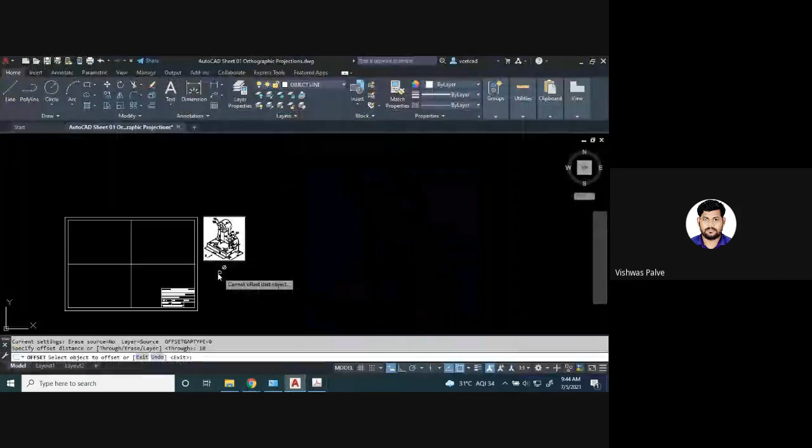Okay, so when we are starting with this orthographic projection, we have to draw the front view from direction X, top view, and right hand side view, which will be drawn on the left hand side. So the first thing we have to record is how much is the maximum length, maximum height, and maximum width of the problem.

As maximum length is 140 millimeter, you can see this is the maximum length of the problem. Can anyone tell me how much is the maximum height? 150. So how you have calculated that? For calculating that, it will be 30, 60 means 30 plus 100, 130 plus 20, 150, and maximum width is 90.

Okay, so when we start with the orthographic projection, first we draw reference lines. After drawing reference lines, we'll take 10 millimeter, or on the paper you have to draw parallel lines at a distance of 10 millimeter, 10 millimeter.

Now when we are going to draw this, we have to draw the right hand side view. Right hand side view will be drawn on the left hand side. So we have to take care that we leave enough space so that we will be able to complete the side view. Okay, that we have to do.

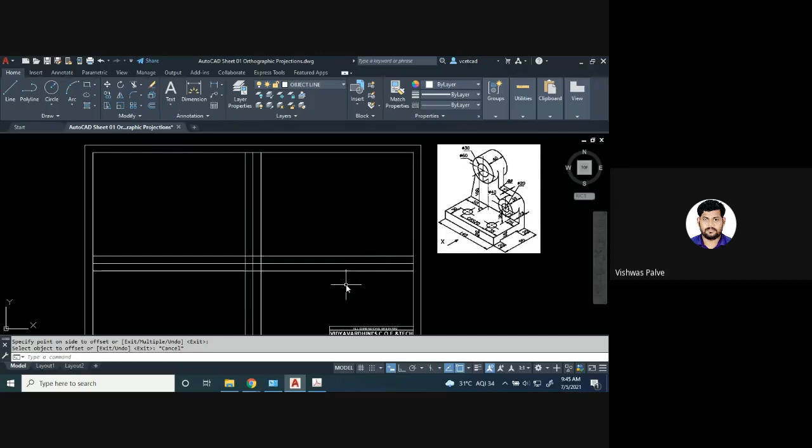Then we'll draw the front view first. In front view, the horizontal line of, we'll convert this as a projection line.

So for the object line, I will start with the base having a height of 20 millimeter and length of 140 millimeter. So I will draw a horizontal line of 140 millimeter, then a vertical line of 20 millimeter, then again horizontal 140, and close it with 20.

So this portion, when we observe it from the front, you will get this rectangle 140 by 20. And in that there are two holes. So those holes and the internal features I will draw later on. Let us first complete the outline.

After doing that, we have to draw a 50 millimeter vertical axis parallel to this 20, at a distance of 50 millimeter from this edge. So I will select this line, offset by 50 millimeter, and take a reference. Now this line I can convert into a center line, and I can change the scale of that line so that it will be visible properly.

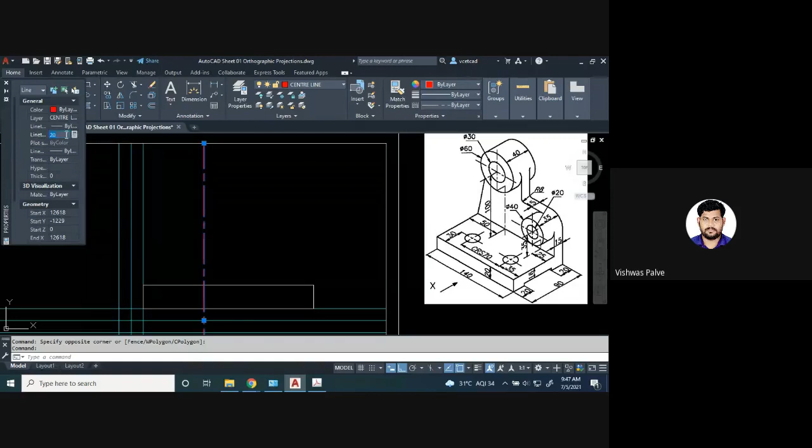Okay, so the height is 100 millimeters. So at a distance of 100 millimeters I can take an offset, drawing a parallel line at a distance of 100 millimeter on this side. So you can see that the problem is not going to fit on the paper. Now here I can directly move it, but on paper you have to calculate how much is the maximum length required, maximum height, and maximum width required, so that you can complete it properly.

So I will delete this for now, and I'll delete this block also, so it will not interrupt my question. Then I'll take this center line and match the property.

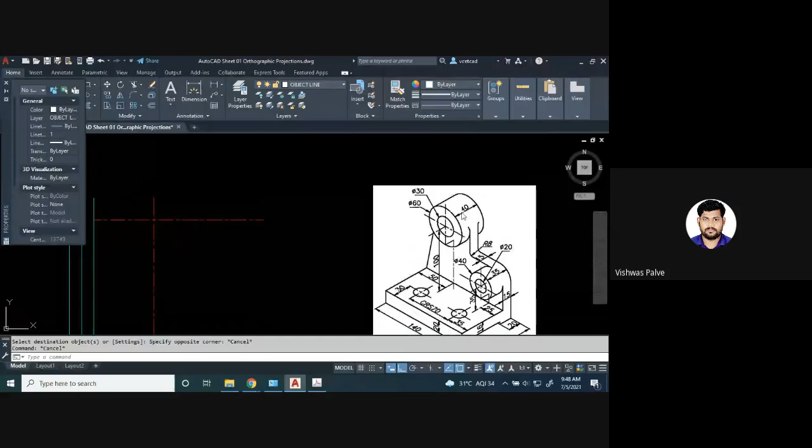This is the intersection point where we have to draw these two circles, one of diameter 60, another of diameter 30. So from this intersection point, we'll draw a 30 millimeter radius, meaning 60 diameter, and a second 15 millimeter radius, meaning 30 diameter. So these two circles I have drawn.

Then next, you have to draw these two circles, which are at a distance of 25 millimeter from the other edge, and height is 35 millimeter. So I can directly take an offset of 25 millimeter. Here is that, and I can extend it slightly, then convert this into a center line.

And vertical distance of 35, so I will draw another horizontal line at a distance of 35 millimeters, so I can locate the center. I'll convert this also into a center line.

After this, we have to draw two circles, one of diameter 20, another of diameter 40.

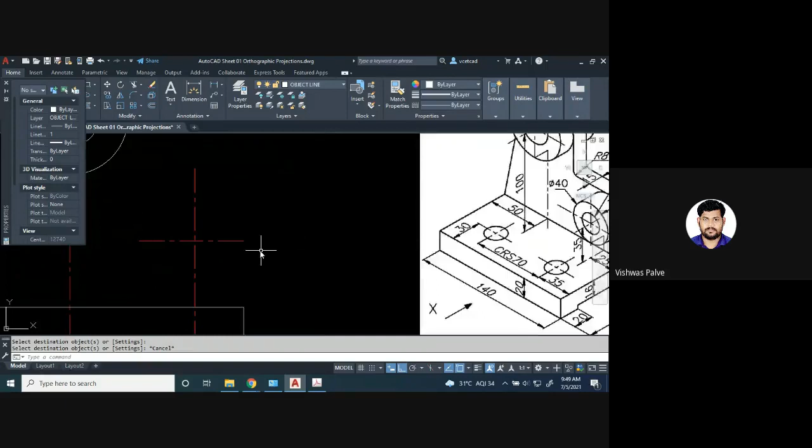Whenever we are drawing an orthographic projection, whichever part is easy, we can draw that first - you have to concentrate on that. So I have drawn these two circles so that a major part will get covered. I located the centers first and then connected them.

After doing so, from here you have to draw a vertical line and then horizontal, connected with an inclined line tangential to that circle. Then similarly, from this point, you have to draw vertical and then horizontal from here.

Wherever those two lines intersect, that will be the point. Then from this point, it will be drawn as a tangent. Okay, the tangent symbol is already being seen, so here we have completed.

Now we can see that a radius of 8 millimeter is given. So how are we going to draw this? On paper, what do we have to do? Suppose you want to draw it on paper with a radius of 8 millimeter.

So what I will do is take a reference of 8 millimeter, and from there draw an 8 millimeter line. Similarly, from this side, I'll take 8 millimeter and draw vertical. So I will locate the center, 8 millimeter from both edges, and from that point I'll draw a circle of 8 millimeter radius.

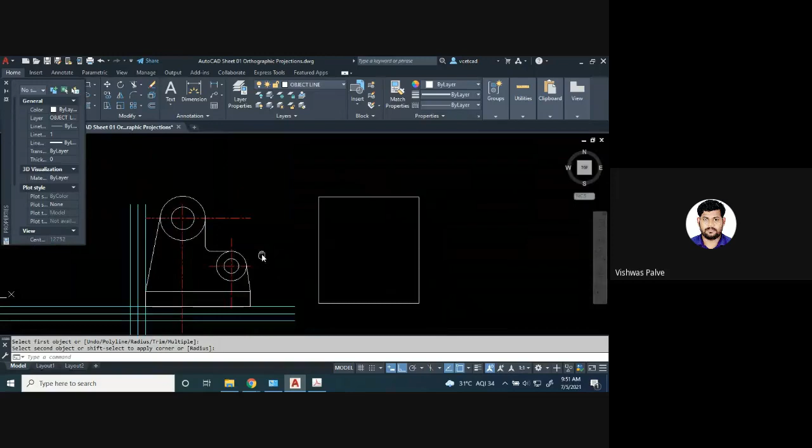Now suppose if I want to draw it on AutoCAD, no need to do all these things. There is a command called fillet. In that, fillet, radius R, enter, radius of 8 millimeter - you have to specify the radius 8 millimeter. Select the first edge, select the second edge, and automatically that edge will get trimmed. So I've given the hint for both ways - you can draw it conventionally as well as on AutoCAD.

Now, after completing this, in front view, what details will be visible? The circular part is done - the bigger circles and smaller circles have been drawn. Only the hidden lines remain, right?

Now there are two circles, and they are marked as CRS 70, meaning the distance between them is 70 millimeter. So first, at a distance of 35 millimeter, I will draw this hidden line. I can take the offset of 35 millimeter. Yes, here there is a center - I can convert this into a center line.

I'll say match property, I'll convert this into a center line. So I have located the center. Now how much is the diameter of the circle? You can see that the diameter of that circle is not mentioned.

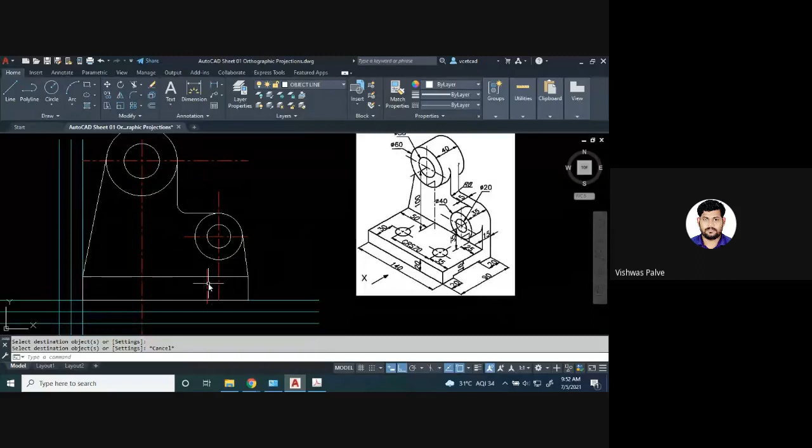Everyone please note down the correction here - the diameter for this circle is 20 millimeter, so 10 millimeter radius. Then I will take a hidden line, L, enter - first I'll draw the center line.

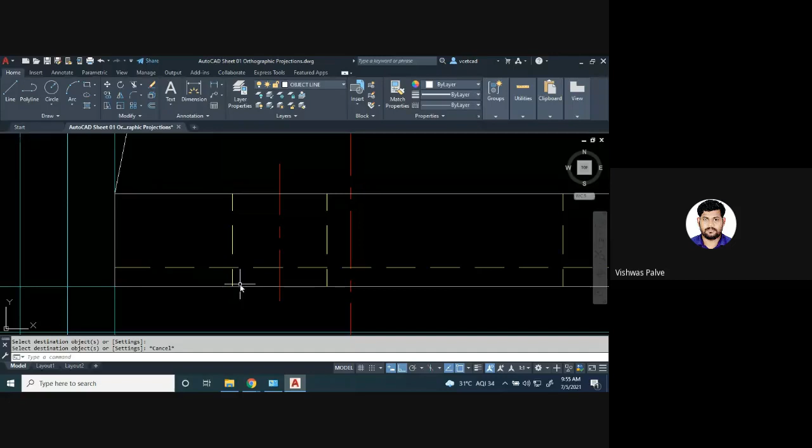Offset at a distance of 4 millimeter from the bottom, and then convert this into hidden. I'll select this line, say match property, and convert this into hidden. Now one more thing - you can see that this slot cannot be beyond the material. Here, let me see, yes, this portion is falling, right?

The material is not there, so I will use TR, double enter, and remove this portion. Because if there is no material then there won't be a hidden line, so this slot will be up to this hidden line - beyond that there won't be this slot. So here we have completed our front view.

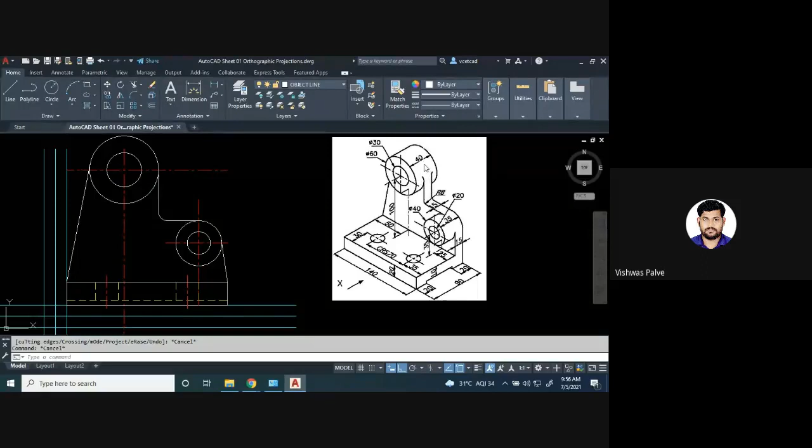So in that, you consider the front portion as 20 millimeter and the rear portion as 15 millimeter. So 15 plus, sorry, one second, 15 plus 50, yeah that is 15 millimeter. This dimension is 15 millimeter.

So 40 minus 15 is the remaining distance, that is 25 millimeter. From that 25 millimeter, you leave 15 millimeter at the front side and 10 millimeter at the rear side. So 10, 15, 15 - this will be the total distribution. Please note down, is that clear?

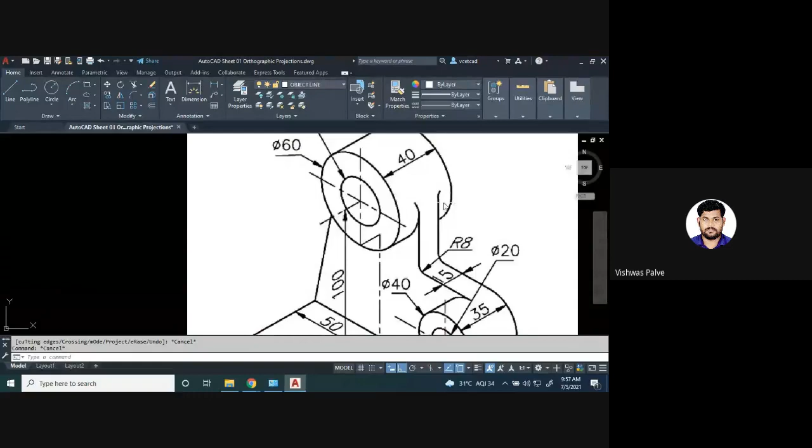So the center portion is 15, the front portion is 15, and the rear portion is 10 millimeters. So 10 plus 15 plus 15, that is the total distance of 40 millimeter. So the total width will be how much? 100 millimeter. It is not 90 because 90 millimeter is up to this extent. So beyond that, the cylinder has been extended.

So that portion also we have to draw. Our first task will be, when we observe it from top, we'll draw this cylinder because this will be completely visible. So that portion I will draw first. I want to draw this cylinder. So how much is the dimension? Let us check, from projection itself I can take the projections. From here I'll directly take projections. Similarly, from the other side.

I'll select the object line now. And the total distance is how much? 40 millimeter. Horizontal distance 60 millimeter, again vertical distance of 40. And I'll close this. Okay, so I have drawn this outer edge.

Now if I don't want the projection line, I can hide it off. If you don't want to view the projection line, I can hide it off, or if I want to see again, I can just switch it on. After that, I will take a reference of this and I will draw.

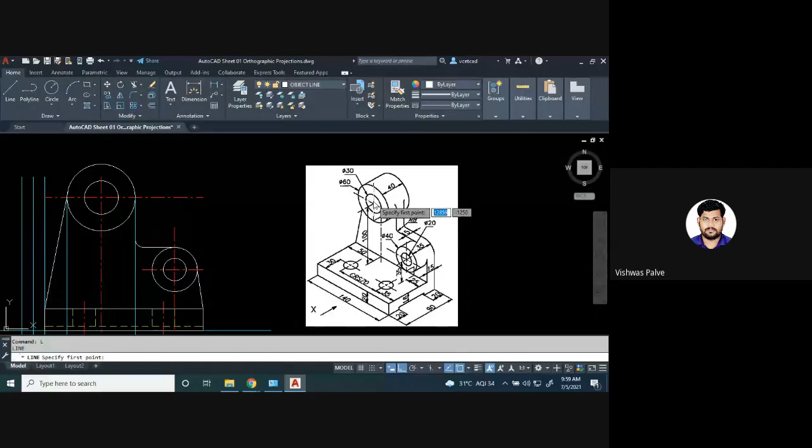I will draw the hidden line. When we observe it from top, there is a hidden line which will be seen. There is an internal slot which will be seen from the top. So we have to show the internal feature of this cylinder, and for showing the internal feature, we will be showing it with the hidden lines.

So for that, I'll take a projection lines, I'll select the projection lines, and draw a reference. Then I can select the hidden lines, L enter. From these 2 points, I will connect it. Then I can change the property of the line so it will be visible, and if not required, you can remove this.

Hello, am I audible now? Yes, sir.

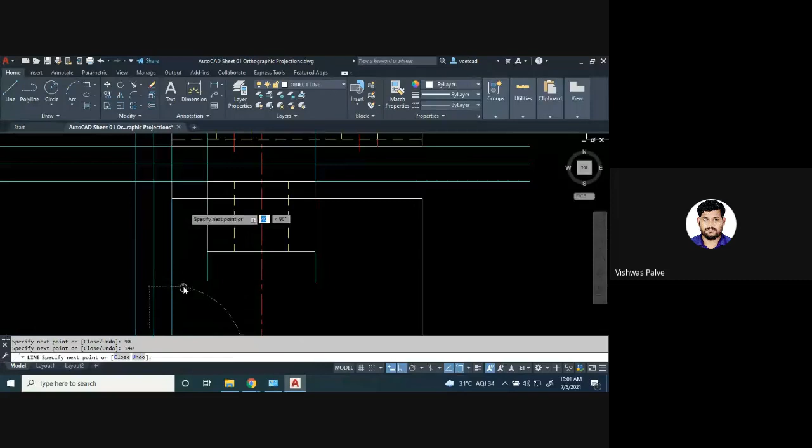And this will be of 90 millimeter. Horizontal distance again 140, and you can connect it with this. So I have drawn this base.

So when we are showing the base, what will be happening? The hidden line, here we have to show the hidden line because it will be visible. So for that, I'll delete this portion. I will draw another line and convert that into hidden, using match property, and convert it into hidden.

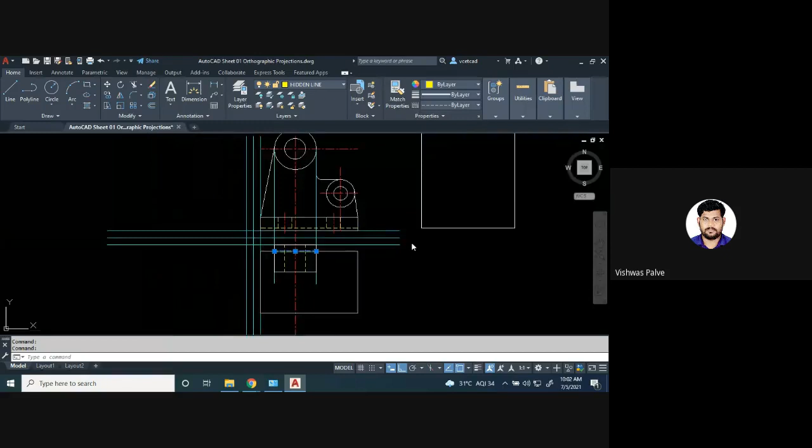Because that slot, that cylindrical portion is hiding the edge, we have to show that edge, and we cannot show it as a dark line because it is not visible from the top, as it is underneath that cylinder. So that's why we are showing this hidden line. Is it clear? Any difficulty till now? No, sir.

Okay, so after drawing the cylindrical portion, now let us move to this another smaller cylinder, which is having a width of 35 millimeter and diameter of 40 and 20. So these are the two circles. Again I will take a reference of projection.

Here 35 millimeter. Horizontal distance 40 millimeter, again I'll connect it with this. So the cylindrical portion I have drawn. The minute details we have to trim off, that we'll see later on.

So let us draw the internal feature, that is hidden line, which is having a distance of 20 millimeter. So if I extend the center line from center line 10 millimeter on both sides, so offset distance, the distance of 10 millimeter. So the internal diameter will be of 20 millimeter.

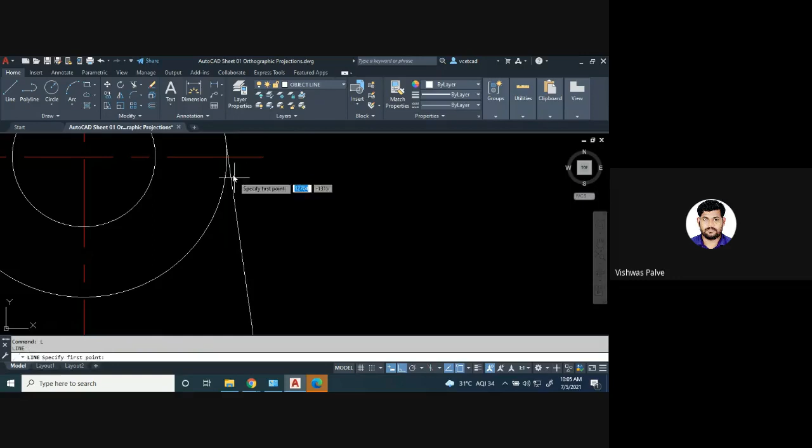Wherever that tangent intersects, that is the point. If you see, it is a very small distance. So I'll draw that distance, 15 millimeter, and connect this rib up to that tangential point, and I'll delete this line.

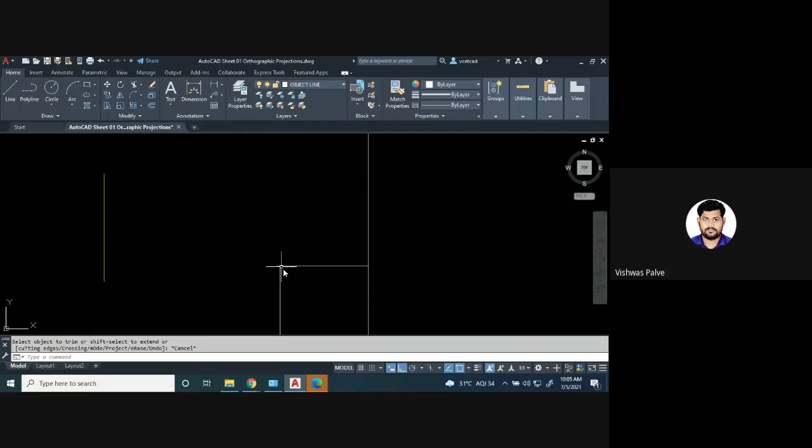So here we are showing the rib. Whenever there is a rib, that portion we won't show this line. You will see only 1 millimeter or 2 millimeter it has been extended, so at that point you have to show the curvature. So this rib portion of 15 millimeter we have shown.

Now let us show this 15 millimeter rib. Already a line has been connected, and then I have to draw this portion will be seen, and then it will be extended till the center line, and this portion won't be visible.

So this rib here is vertical, so it will be seen as a straight line, but the horizontal portion of that rib will be seen up to center, and the cylinder will be hiding below that. So that portion we are going to show it here.

Now this edge, you can see that this edge of that cylinder or the corner edge will be visible, that is at a distance of 15 millimeter. So we have to show that edge.

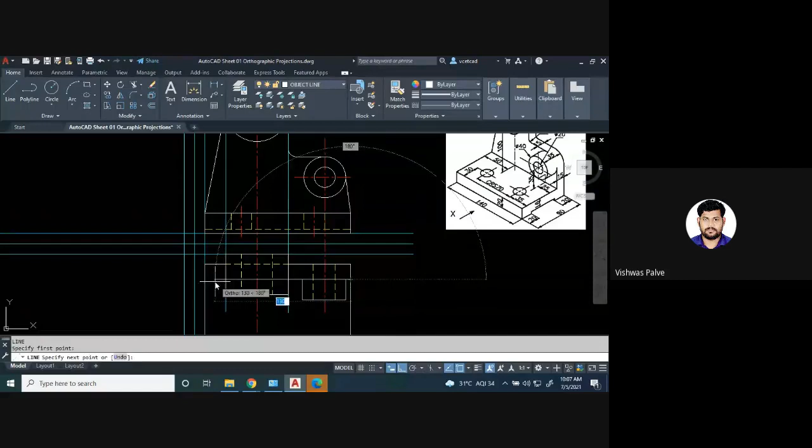So what I'll do, I'll draw a line from here up to this point, and I will trim the edges wherever it has overlapped. This portion I don't want. Similarly, wherever it is falling outside, this portion, this portion, this portion.

This rib, the corner point, wherever there is a change of the surface, that we have to show. So wherever that portion has been drawn, that part we have to show it as a hidden line. I will draw a hidden line here.

This hidden line will be visible. Then again, this hidden line will be visible. Then in the cylindrical portion, complete line will be there. So, match property.

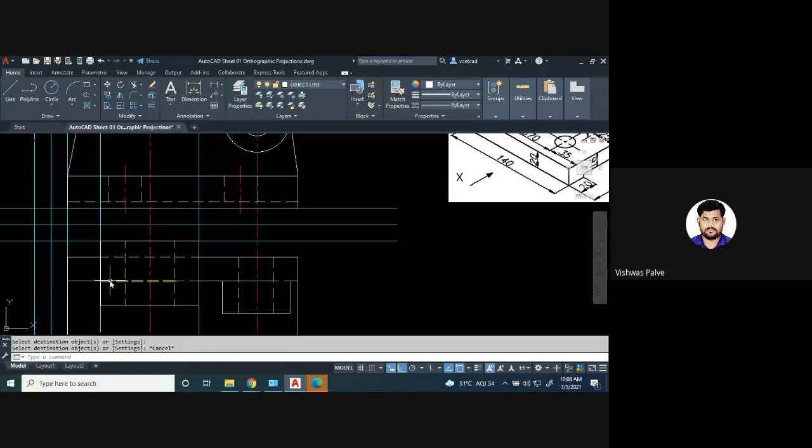Control Z. Okay, so this much portion won't be visible, so that we have to show it with a hidden line. Here what is happening, the top edge has been visible, so it is overlapping, the hidden line is overlapping with the object line. So whenever there is an overlap between the hidden line and object line, the preference will be given to the object line, so that this also will be hidden.

So we are going to extend this line up to there. Okay, so the hidden lines have been drawn.

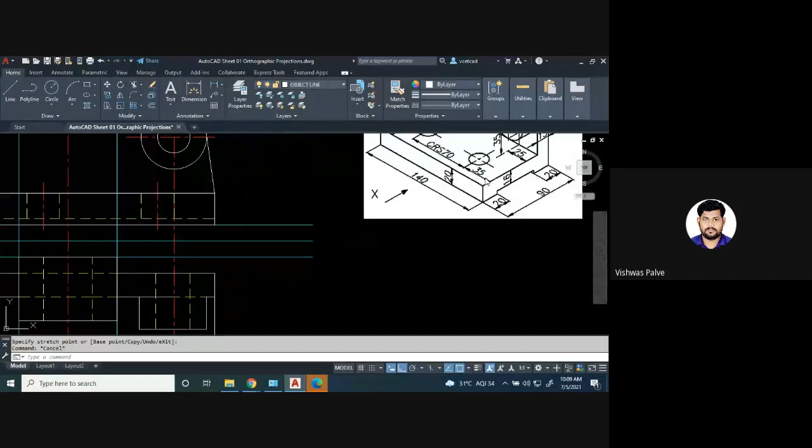Now let us draw the circle, 35 millimeter and 30 millimeter from the other side. So already the center lines are there, but still at a distance of 35 millimeter and 30 millimeter from here. So I have located the center at 35 millimeter and 30 millimeter. At that point, I have to draw a circle of 10 millimeter radius.

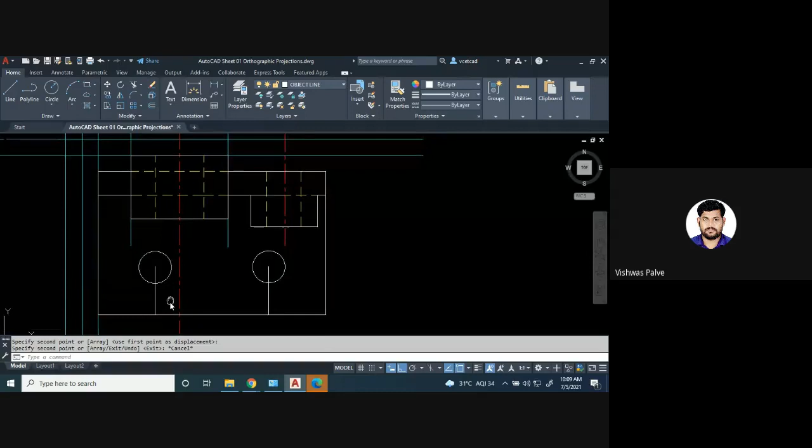Same distance, at a distance of 70 millimeter I will draw another circle of the same radius. Then I will convert these lines as a center line.

I used to draw this as a center line. Similarly, horizontal center line. Whenever there is a circle, you have to show the center lines. Okay, these two circles I have drawn.

Now below that there is a slot, and the width of that slot is 20 millimeter on the right side, 20 millimeter from the left side. From both sides it is 20 millimeter. So we have to show that slot.

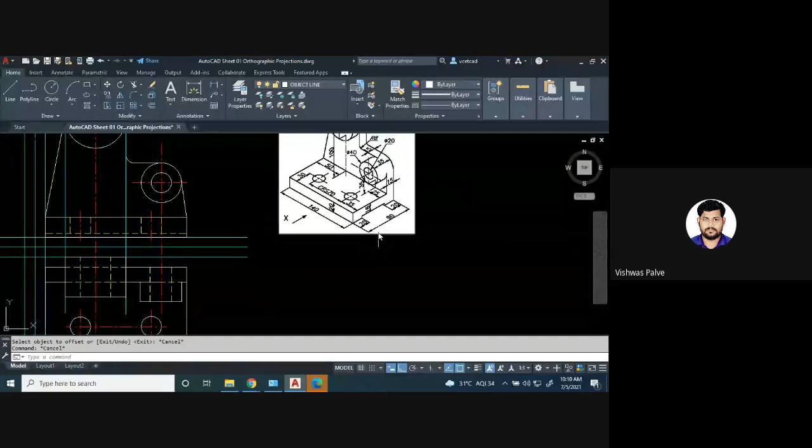So for that, I will take an offset distance of this 20 millimeter on this side. Similarly, total is 90, 90 minus 20 is 70 millimeters. So from this edge, it will again be at a distance of 70 millimeter. Offset at a distance of 70 millimeter from this edge.

Okay, these are the two lines. I'll convert that into a hidden line. When we observe, that slot should not be visible, so we cannot show it with an object line. For that, it has been shown with the hidden line. So here we have completed our top view.

If you want to see the minute details, I will switch off the projection lines. So to complete both the views, how much is the maximum dimension required?

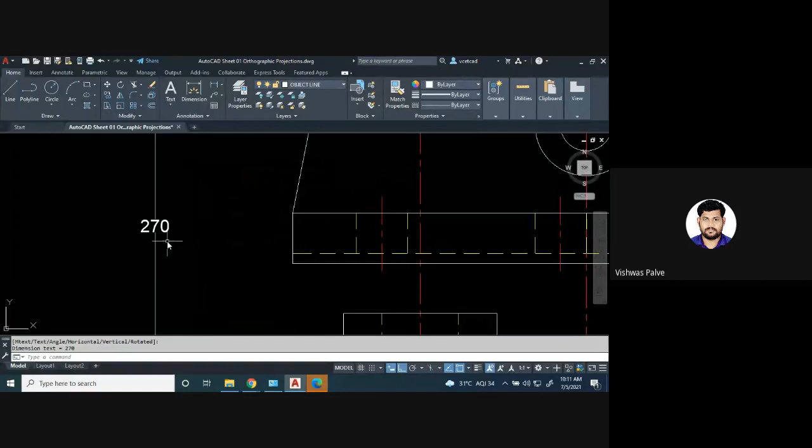270. How much is the size of the A4 size paper? Somebody has posted that it is not fitting on the assignment book.

Please everyone make this correction so that it will fit. Instead of 100, you take this as 60 millimeter.

Will it fit then? Hello, Rohit. Yes, sir. If you make this 70 and you make this 25 instead of this 35, how many of them have started drawing?

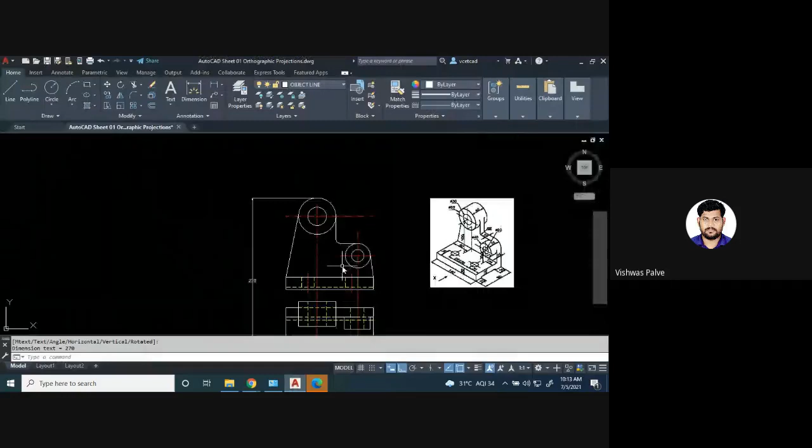Will it fit then? Rohit, please check. If you take this as 70 and this as 25, so do one thing, you take this as 60. Instead of 100 millimeter height, you take this as 60 millimeter and you take this as 25 millimeter. Then it will solve your problem.

And one more thing, if you want to save space, then instead of taking the offset distance of 10 millimeter, you take it as 5 millimeter from both sides, 5 millimeter from bottom, 5 millimeter from top. So here also you will get 10 millimeter.

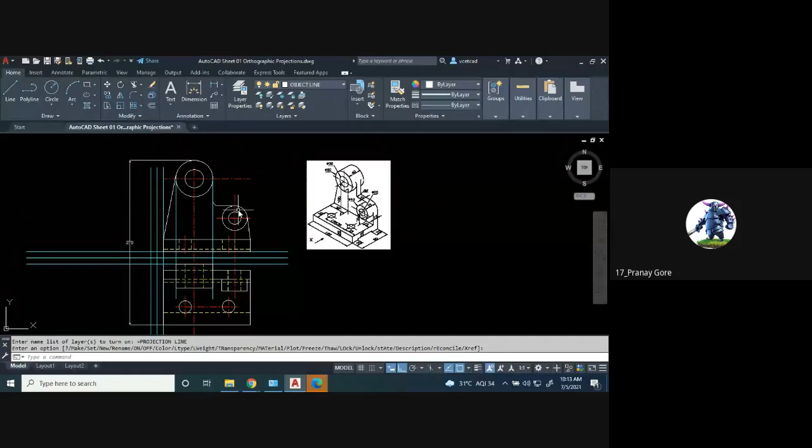Then you will... Can we try portrait mode? Portrait mode will not fix the side view. Please check whether side view is fitting or not.

Let me complete the side view and then you can decide whether you want to draw portrait or landscape. So if you want to fix it, I have given a solution.

You can reduce this dimension to 60 millimeter and this 35 you can make 25 millimeter. So the height of that problem will automatically get reduced. Let me reduce that. If I reduce, then what changes will we see?

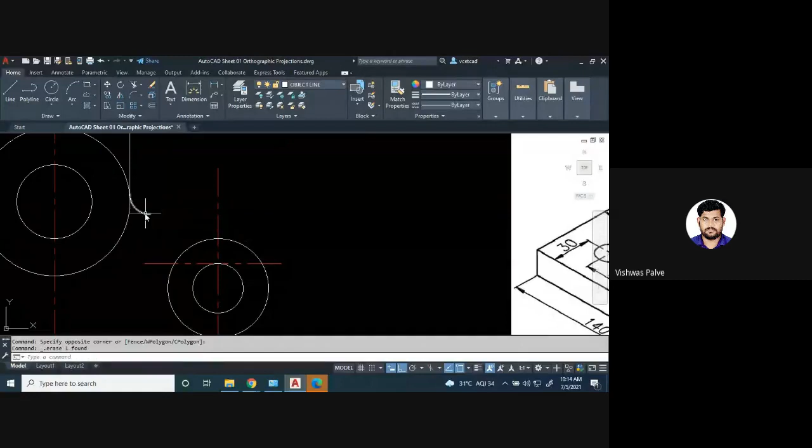This by 40 millimeter if I reduce, and this I want to reduce by 10 millimeter. So the changes will be these lines. I will redraw those lines.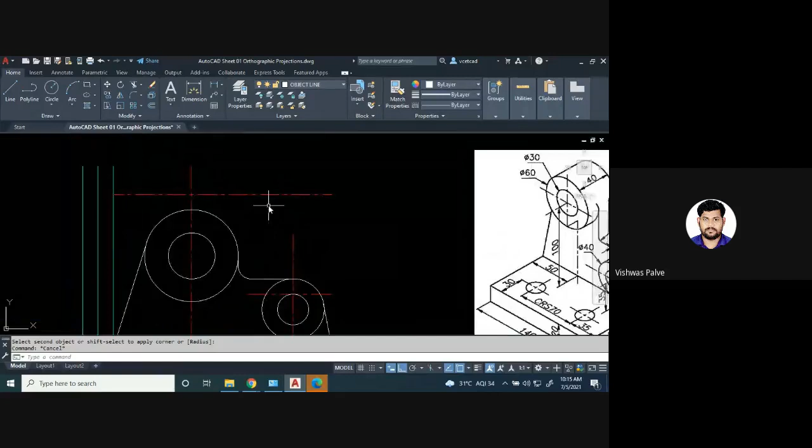This will be the changes. So now how much is the maximum height? I'll check and tell you. It is 230 now.

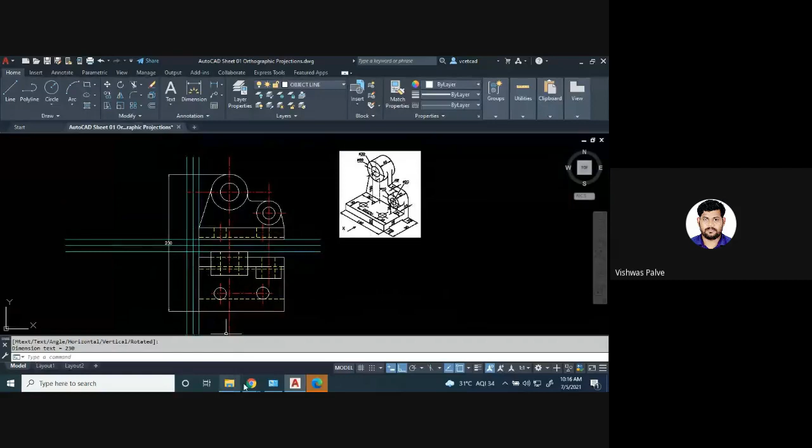Yes, Rohit. Yes, sir. Sir, in portrait it is fitting. Okay, in portrait, if it is fitting, then you can solve with the normal dimensions, no problem then. And those who have started with the landscape mode, you can make these small changes and solve this.

So should I continue with the side view? Yes, sir. Okay. Any difficulty till now in front view and top view? No, sir. Okay, fine.

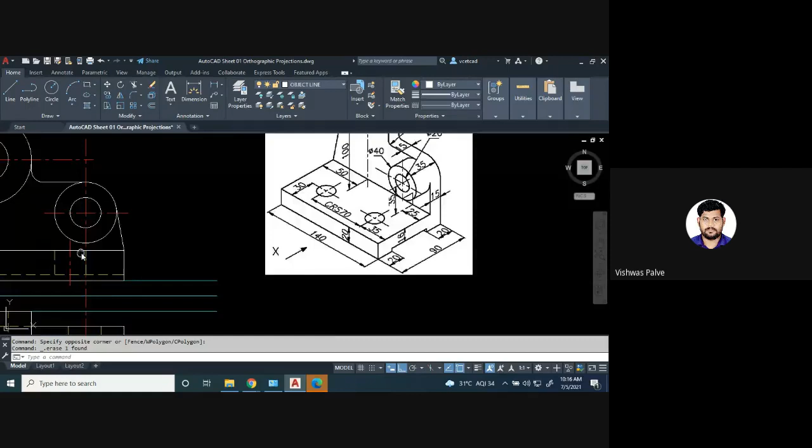So let us move to our side view. When we observe this object, the first thing which will be seen is this 20 millimeter and 90 millimeter is the total width, and height of 20 millimeter and 18 millimeter. So this we have to draw with projections. I'll take projections here.

This is that edge. I will first take L, enter. I want to draw an inclined line of length 200 millimeter, at an angle of 135, so it is a 45-degree incline.

I will take the projections. Similarly, I'll take the horizontal projections from various points.

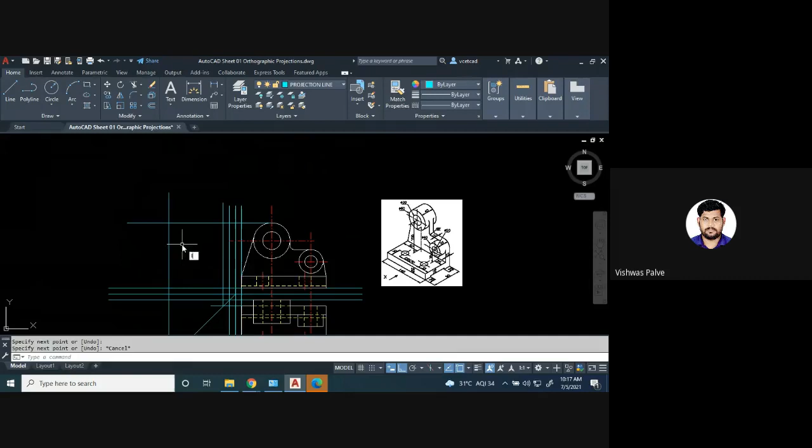After doing this, I will select the object line and draw these features first. Enter. From this point, 20 millimeter horizontal line, then 20 millimeter from here.

From bottom, it was having a distance of 4 millimeter. Horizontal distance of again 90 minus 40 -- it's 50 millimeter is the center to center distance, and again 4 millimeter.

So when I hide the projection line, you can see that this feature I have drawn. Then I'll trim it off. The remaining features I can trim off.

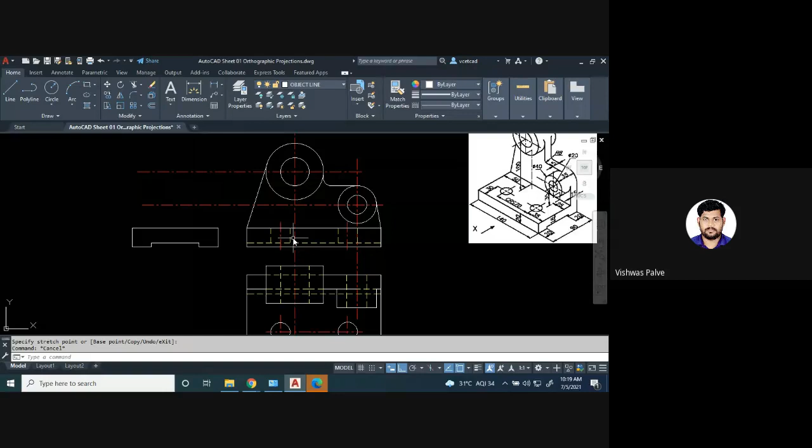I will just take a projection of the center line and try to draw the cylinders. So when we observe it from here, first let us draw this complete cylinder.

It is at a distance of 35 millimeter from this edge. So I will draw a vertical line from here up to the center line. Then diameter of that is 40.

20 millimeter, 35 millimeter, 40 millimeter. And here it will be at a distance of 35 minus 15, 20 millimeter.

This portion will be trimmed, and this line will continue up to the center line, slightly above the center line. One second.

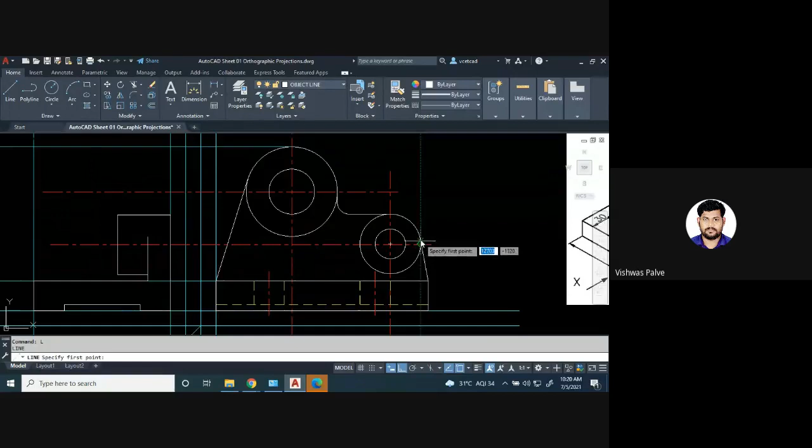That will be till the projections. So again I'll switch on the projection lines. Enter. You can see wherever it makes a tangent, till that point you have to show that line.

Okay, this will be that line. So I will delete this now as a reference I have taken. So the horizontal cylinder I have drawn.

In that there is a hidden line, so we have to show that hidden line. Offset at a distance of 10 millimeter, bottom. Offset at a distance of 20 millimeter now.

Okay, so the internal feature of the cylinder has been shown. Now let us draw the bigger cylinder.

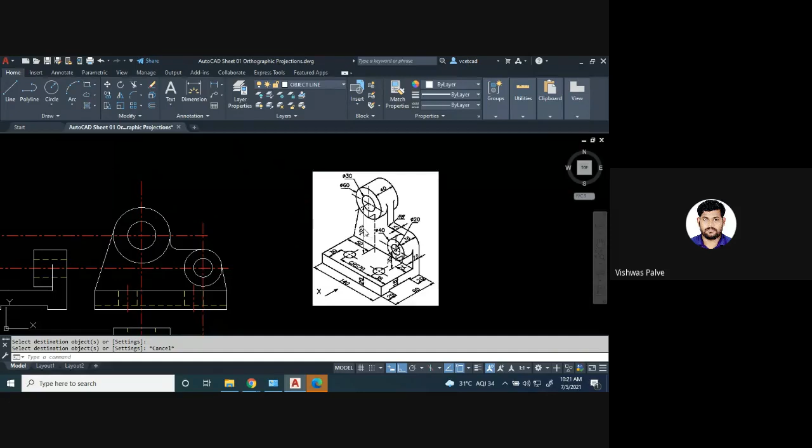When we are drawing with 100 millimeter, that time this will not be seen as a hidden line. If we make changes, we have to see whichever part is hiding behind that cylinder, and modify that portion. So I will draw with the normal dimensions so that it will be easier for you to imagine.

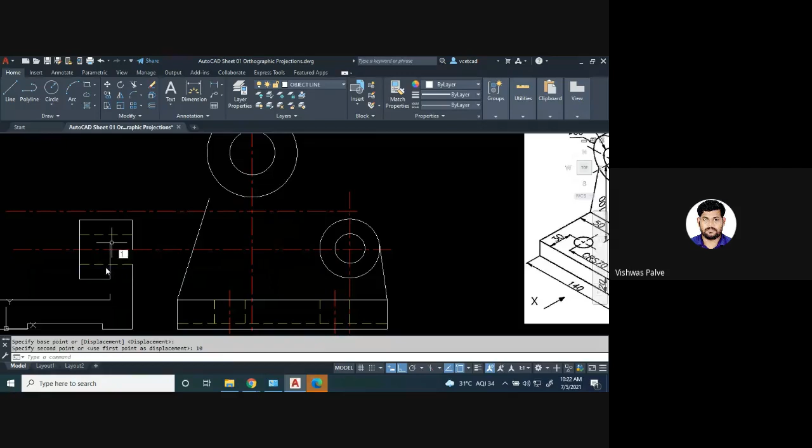Now this I'll move to its original place, and this also I'll move to its original place. So this is the problem without modification of that height.

Okay, now let me take the projections. So when we take projections of the cylinder, first I will draw the cylinder as a complete one, and then we'll change it. Whatever modification we want, we can do it. So let us start with this line.

I'll make it vertical from this point up to here, and the total width will be again 15 plus 15, 30 millimeter from this point. Okay, 30 millimeter from that point. Delete this, and from the rear it will be 10 millimeter. Vertical distance of 60 millimeter, horizontal distance 40 millimeter, and then it will be closing here.

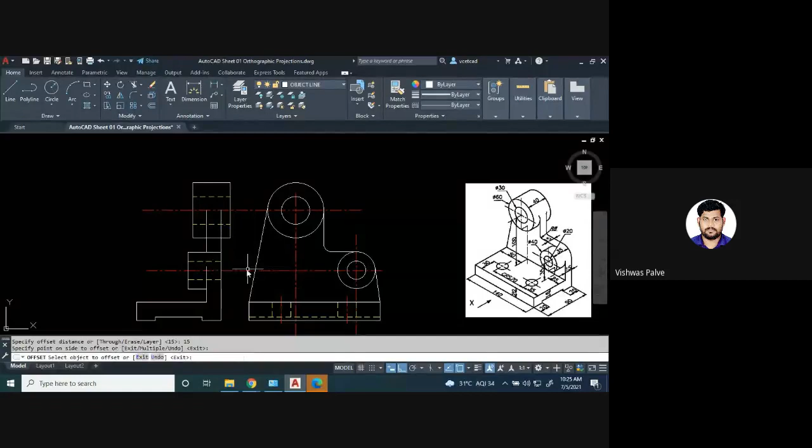So this portion I have drawn. So in between, this line will not be visible. So whenever this edge is not visible, you have to remove that edge. So it will be seen as a normal cylinder.

Now the rear edge also will be visible, so that will be seen as hidden. So that portion we have to show.

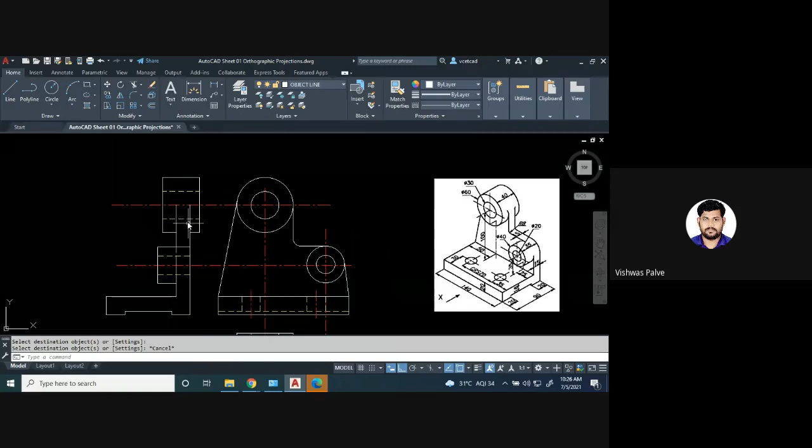So this portion we have to draw it again, and it will be seen as a hidden line, match property. Because on the other side there is this edge, and this edge is going to be parallel to this. So we are going to show that.

Now the features which are remaining: both the cylinders have been drawn, this rib has been shown, only the slot is remaining. The slot is at a distance of 30 millimeter from one of its edges. So I'll select this, offset of 30 millimeter on right side.

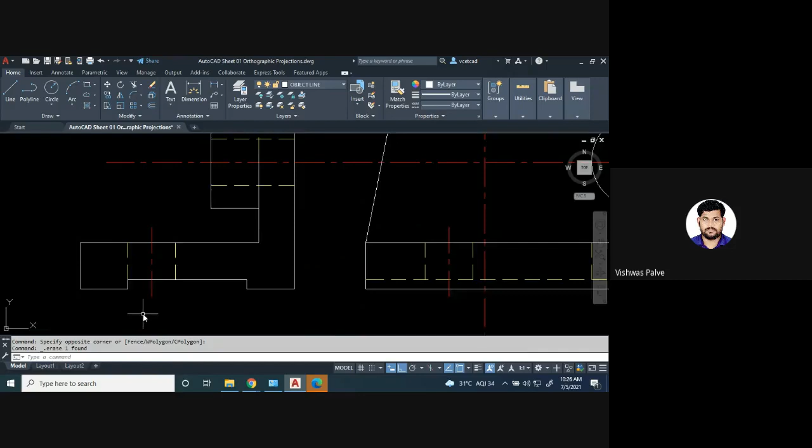Then I'll copy this from here, exactly at this point. Delete this. So the hidden features also has been shown.

So here we have completed this problem with projection lines and all. I'll change these features to dimensions. I'll hide the projection lines.

So any difficulty till now for this problem? Now you can give the dimensions.

For dimensioning, you have to maintain the scales and the proper format. You don't have to give the dimension inside the object. Dimension should be outside, and give maximum possible dimension whenever you are drawing.

So here we have to use the dimension layer for that. Give the maximum possible dimension. Rename this view, and we can complete this.

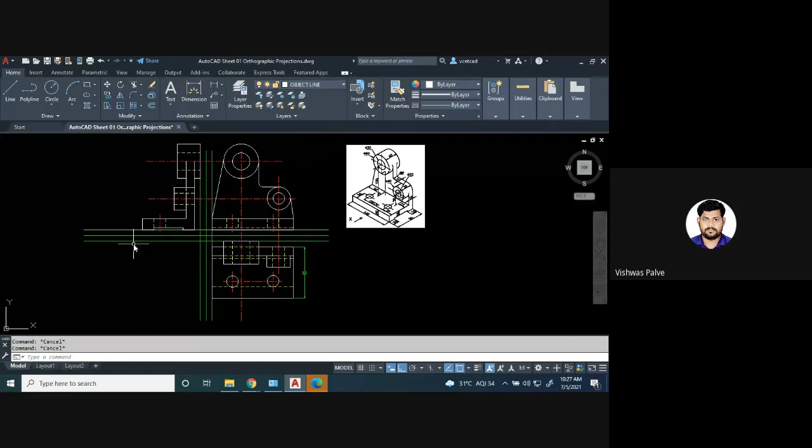Now let us start with the second problem of the assignment. Oh sorry, term worksheet.

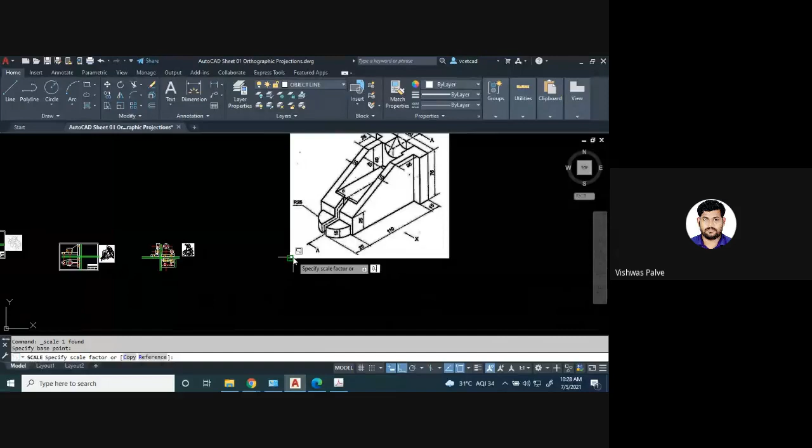Okay, I'll copy this in AutoCAD. Scale it to base point. Yes, here, point 2, done. I'll select this reference lines also for my.

So what is my first step? Whenever we are starting with an orthographic projection, what is the first step? Now in this problem, we have to draw the front view, top view, and left hand side view. Left hand side view will be drawn on the right hand side. Here I will draw my front view, here my top view, and left hand side view will be drawn here. So let me find out the maximum length, width, and height.

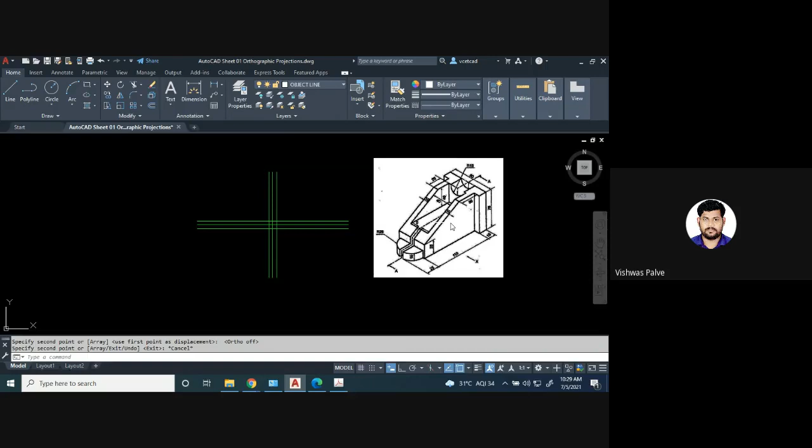So how much is the maximum length? Can anyone tell me? Yes, 150 millimeters. So how is that? 25 plus 110, 110 plus 15. So that is the maximum length.

Maximum height? 75. And maximum width is how much? 80, right.

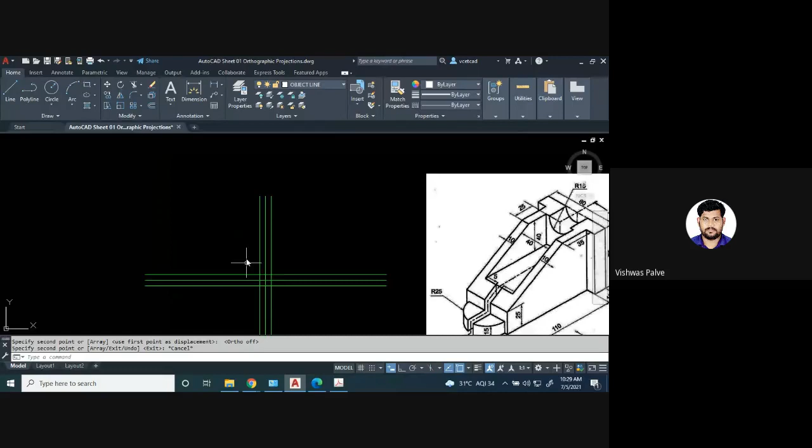So let us start. In this we have to draw sectional front view, so first I will directly draw the sectional front view and top view. These two features, because we are having only 30 minutes, so in that I will try to complete the three views. But first I will concentrate on sectional part, that is front view, and top view I will complete first.

So while starting with this problem, I'll start from this corner point. How much is the vertical distance? 75 millimeter. Horizontal distance, 1 second. I have not switched on my ortho mode, so the line was not vertical. F8, okay, ortho on.

From this point, 75 millimeter. Okay, horizontal distance of 15 millimeter. Then vertical distance of again 75. Okay, so this portion I have drawn.

Then after that, the bottom part, 110 millimeter. So already 15 millimeter I have drawn. So from here I have to draw a horizontal line of 110 and 25 millimeters. So that I will connect it directly. So this will be again 25 millimeter.

Then vertical distance of 15 millimeter, horizontal distance of 25, and from this point I will draw vertical distance. It should be 10 millimeter because already 15 millimeter has been taken. So that I will draw.

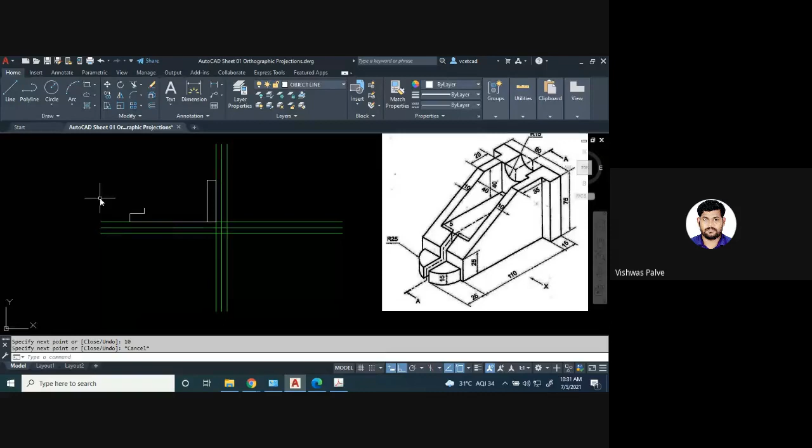So the vertical total distance, you can see this 15 minus 20, 25 minus 15, so this small portion is 10 millimeters. So that I have taken. We have to imagine that when we cut this object, how it will look, so that we are going to draw it.

So from this point, it is at a distance of 35 millimeters. So this portion we have to show. This is 35 millimeter. And when we cut this object, the internal feature will be visible, so that also we have to keep in mind. Radius is 15 millimeter. And this is 25 millimeter from this side.

So first I will draw 35 millimeter and then let's see what happens. From that point, I will connect this as an inclined line. So this feature I have shown.

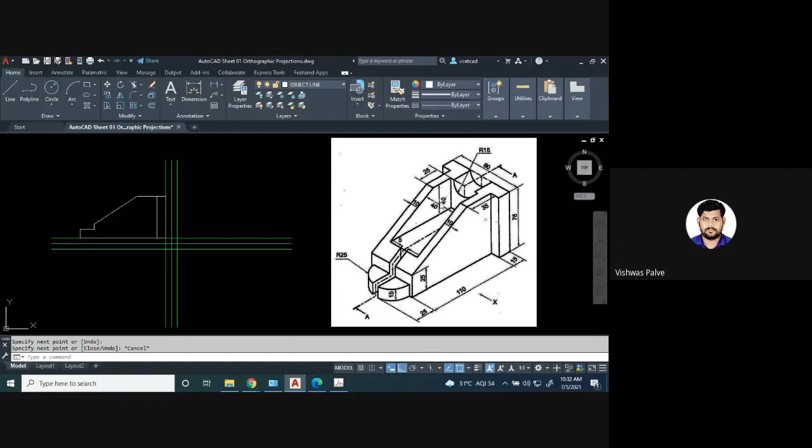Now when we cut this object, this semicircle will be visible. How much is that width? Here you can measure that 15 plus 35. Total width is 50. 50 minus 25, so the remaining portion is 25 millimeter. So at a distance of 25 millimeter, I will draw a vertical line.

And how much is the diameter? Radius is 15 millimeter. So I will draw a vertical line of 15 millimeter. And then I'll connect it horizontal.

So when we draw a sectional view, that time this line won't be visible, so I will remove that portion. So this slot of 15 millimeter and 25 millimeter is being shown.

Similarly, you can see that at a distance of 40 millimeter, there is a horizontal line. So from this point, I will draw vertical distance of 40 millimeter and draw a horizontal line. I'll extend it and I can trim it off. It will be up to this edge.

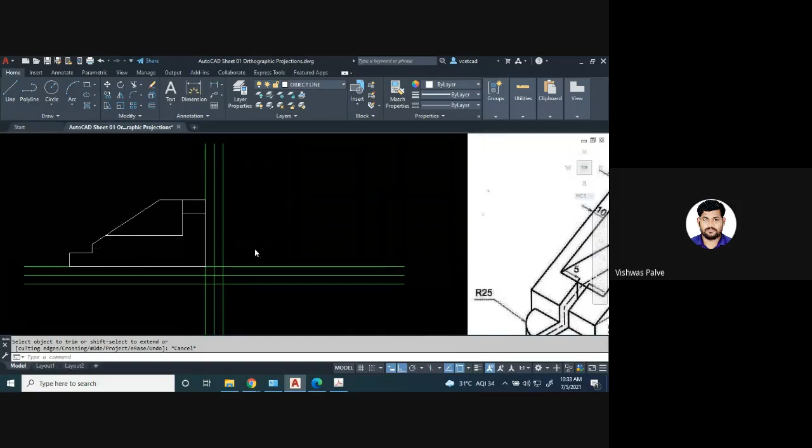Okay, when you cut, from that edge there is a slot. So I will draw this vertical line.

So we don't have to show hatching here because there is an empty space, right? This empty space is there from this edge, so here there won't be hatching. Only this much portion will be seen as hatching. So that we have to take care whenever we draw front view.

So hatch. When we draw a normal hatching, that time you have to take care that the angle will be 45 degree, and this line spacing will be almost 2 millimeter, 3 millimeter. So that you have to take care.

So I have shown this hatching. This much portion it will be seen as hatching, and the remaining portion won't have hatching because there is no material. Wherever there is no material, we don't have to show hatching.

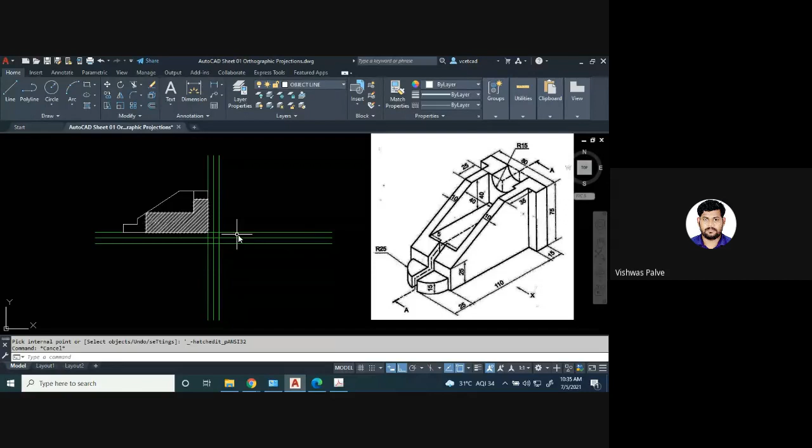Now let us draw the top view. This is the sectional front view. After cutting the object, only this much portion will be seen as hatching, so you have to take care of that.

Now when we draw the top view from this point, how much is the total distance? 80 millimeter, then a slot of 15 millimeter. Similarly, from the other side, I'll enter. From here, it will again be 15 millimeter.

Then I will draw a center line for reference, matching the property of this sheet itself. The center line will help us draw this slot. When we observe it from top, you will get this slot, right? So that we have to show.

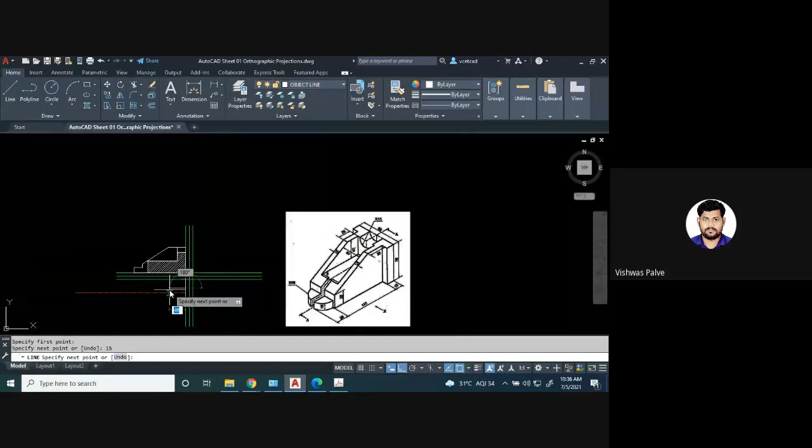So when we observe it from top, from this point it will be at a distance of 15 millimeter, and depth of that slot is 25 millimeter... 30 and 25 millimeter. So from top, when we observe, I have drawn this slot.

Now the remaining portion which we have to show is 10 millimeter, so it will be of 10 millimeter distance here. The in between distance is 40. So 40 plus 10 plus 10, that is 60 millimeter. 80 minus 60, so it will be remaining 20 millimeter.

So 10 millimeter on this side, 10 millimeter on the other side. 10 plus 10 is 20, 20 plus 40 is 60, 60 plus 10 is 70, 70 plus 10 is 80. So this is the calculation.

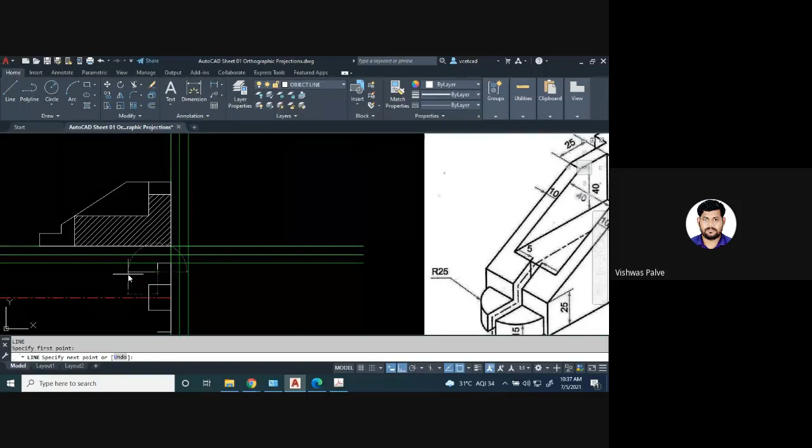So I will take 10 millimeter here. From that point, after taking 10 millimeter, we have to extend this distance up to 50 millimeter. I will draw... delete, will be up to 35 millimeter. So you can see that it will match with this edge.

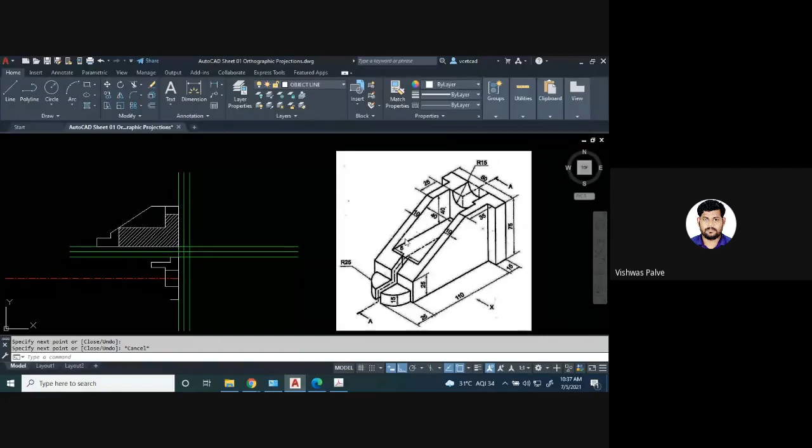After that, we have to take 10 millimeter horizontal line up to that edge. Similarly, on the other side, we can draw it using a mirror. So first I will draw this slot here.

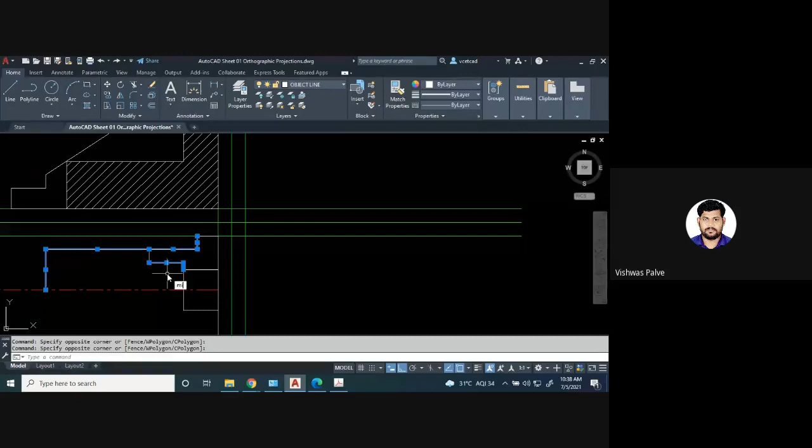Same features we have to draw on the other side. So when we observe it from top, you will get this feature.

Now take a reference from this point. So 10 millimeter, 10 millimeter inclined portion, but in the top view it will be seen as flat. That we have shown here. This slot of a circular hole, semicircle, is 15 millimeter, that we have shown. Then this L shape also is being shown in the top view.

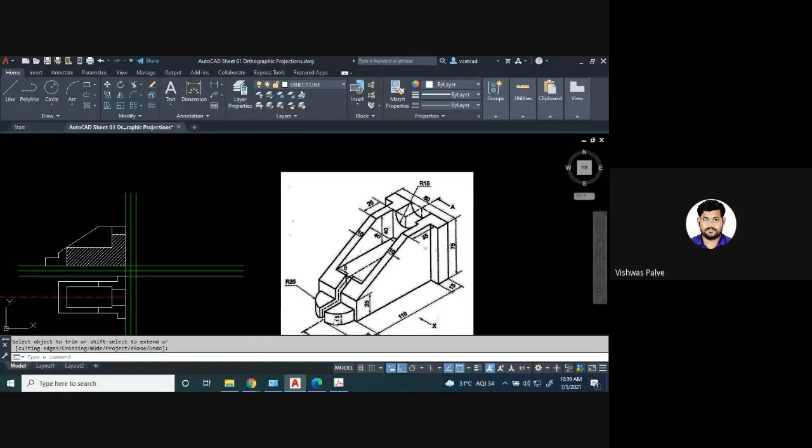Now let us draw this semicircle, having a radius of 25. So from this point, I'll enter. From this point, I will draw first a circle of 25 radius. I'll trim off the half portion. The half portion has been removed.

Then we have to show a parallel line, gap of 5 millimeter. You can see the gap of 5 millimeter, so 2.5 millimeter from one side of the center line. So from this point to this point, it has a gap of 2.5.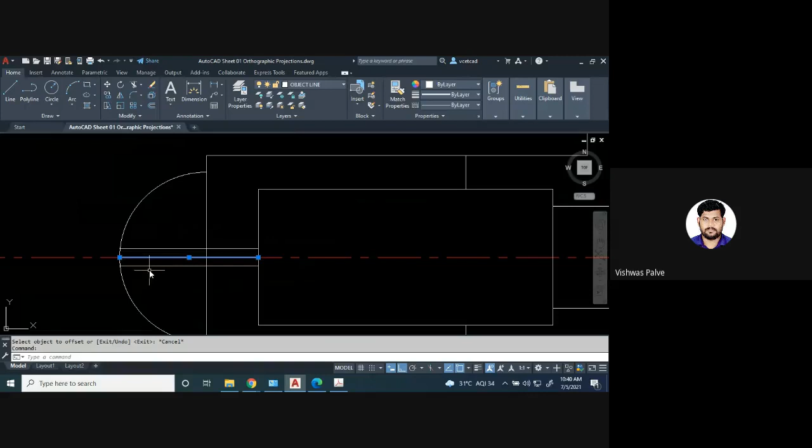So I'll offset 2.5 millimeter from this point on the other side. And the reference line which I have drawn, I will delete it. I will use the trim command and trim this edge. Similarly, I'll remove this edge.

So you can see that the slot will be visible from the top view. So that slot has been drawn. Here we have completed our top view. Any difficulty in front view and top view of this problem?

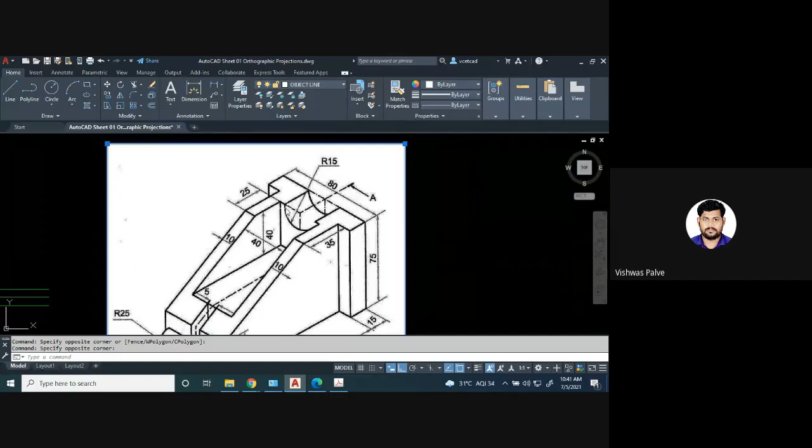फिर ये वर्टिकल लाइन, सेंटर लाइन ड्रॉ किया। ये स्लॉट कितने डिस्टेंस का है? टोटल स्लॉट है 40 का, उसमें से कर्वेचर कितने का है? डायमीटर 30 है, मतलब सेंटर लाइन से यहाँ पे 15। सो ये जो छोटा लाइन बचा है उसका डायमेंशन कितना रहेगा?

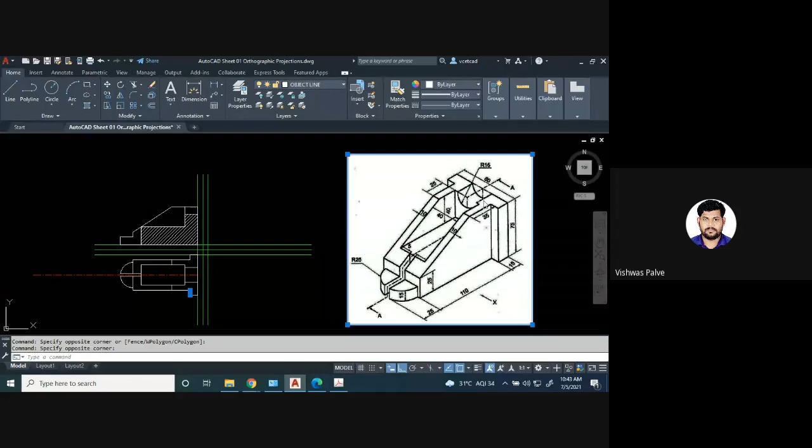Okay, 75 and whatever the width is, that is 80 millimeters. So that rectangle you have to draw it. So L enter from this point, 75 height, width of 80 millimeter, 75 millimeter and 80 millimeters. So this rectangle will be visible. Then if I take the projection of the center line, I will take the projections.

Angle 45 degree, incline line draw किया. I will take the projection of center line, extend it up to this line. You have to extend. From that point, I will draw a vertical line. You can draw it with dimensions also, but it is expected that you should draw this side view with projections.

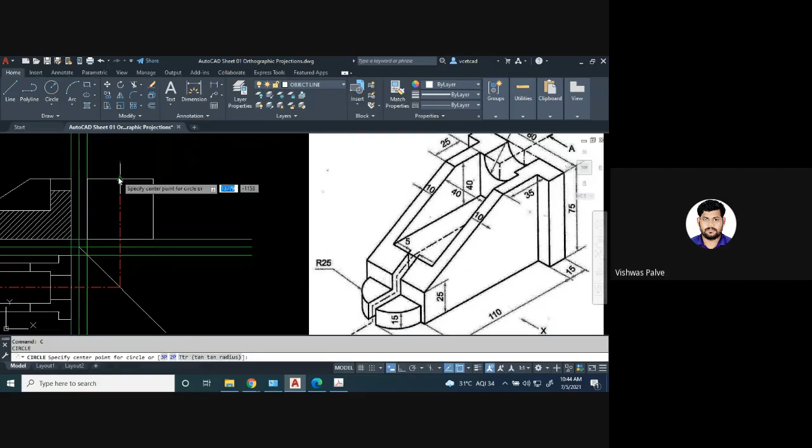Okay, so I have drawn the side view, center line of the side view. So once you draw the center line, first thing which we can easily locate that this semicircle, so that we can easily complete. It is having a radius of 15. Then you can trim this portion. जो सबसे easy part है वो पहले draw कर लेने का, जो अपने को imagine होता है। पहले क्या दिखा? ये semicircle, so that you draw it.

Then you can see that when we observe it from here, these vertical lines you can see, and that distance is 10 millimeter, अभी मैंने explain किया 10 millimeter। So that also we can easily draw। One second, offset distance of 10 millimeter। I will select this line, draw 10 millimeter, 10 millimeter। So this portion I can easily draw 10 millimeter, 10 millimeter।

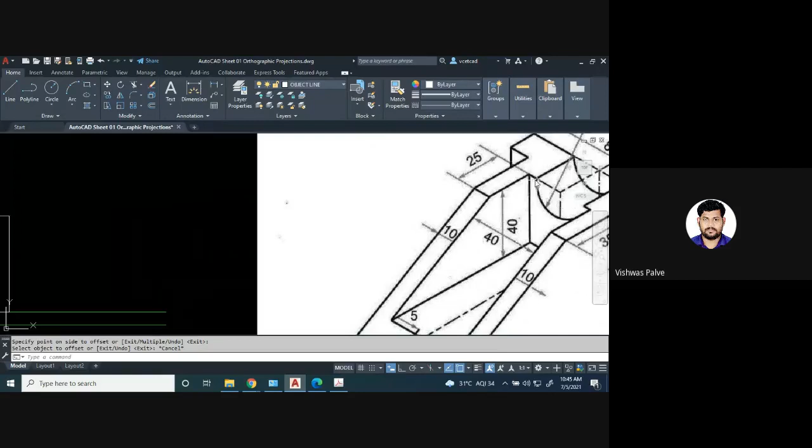ये जो side का edges है, okay। अभी बाकी बीच का portion अपने को draw करना है। So this is 5 millimeter। So from here I will take 5 millimeter। I will take a projection first also।

Okay, you can see this horizontal line। Now I'll trim this edges। If you take a projection of this corner point, right, this is nothing but this edge। So that edge is visible here। So I have shown that edge।

Okay, now I have to show this 10 millimeter, 10 millimeter on the other side। So starting with this curvature, from this point I will leave 5 millimeter space, and then I have to draw a vertical line। That's it। Okay, similarly here, we'll leave 5 millimeter space। We'll draw a vertical line, F8।

Okay, so this edge is, when we observe it from side, it will be looking shorter। Okay, so this rear portion also will be visible। Now let us draw this curvature, right? This slot here which we are showing, that we have to draw। So we know that the radius is 25 millimeter and height is 15 millimeter। So from center, first I will draw 15 millimeter।

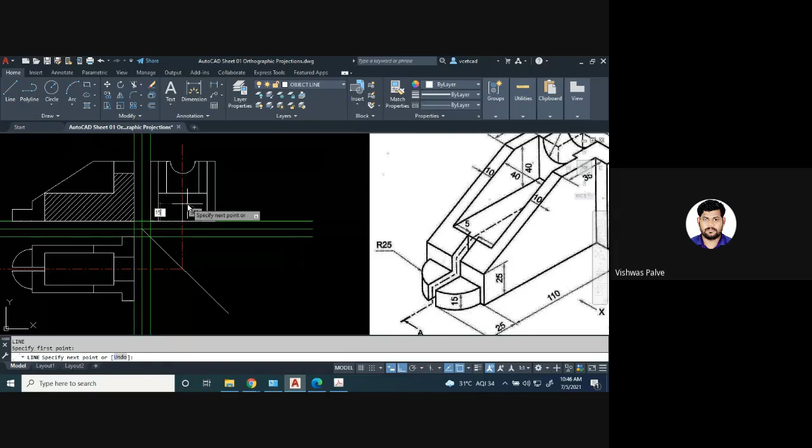Okay, then offset of 25 means 12.5. Okay, radius of 25. So it will be of 25 millimeter, total distance 25.

So on right side, on left side, this slot is of 5 millimeter, right? So that also we have to show. I'll say offset, but this slot will be up to this portion. So I'll select this, O enter, 2.5 millimeter on right side, 2.5 millimeter on left side, L enter.

I will connect these two edges, TR double enter, trim the center portions. Okay, delete this line which is of no use now. Okay, I have drawn this portion.

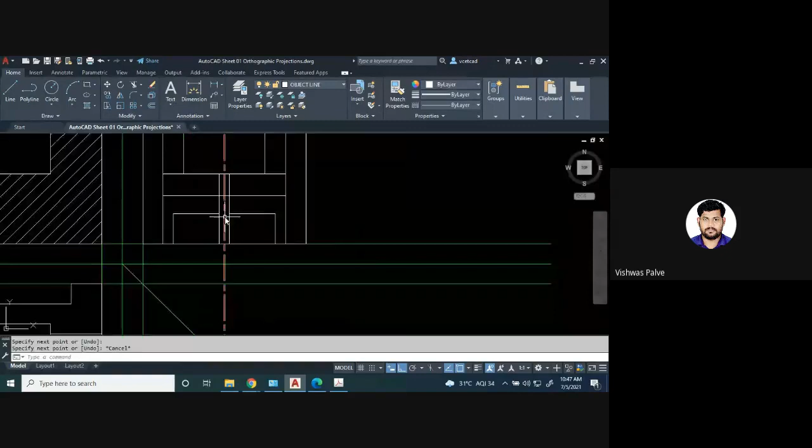Okay, now for that I will connect this. A horizontal line also is there, so that also I have to connect. So this corner point, you can take a projection of that corner point starting from here, okay, till this point, and then you can remove the internal feature, that is this slot.

Okay, this portion is not visible, so this slot will continue throughout. So here this is continuous, then we'll get two quarters, 25 millimeters each, 25 millimeters, so and which center portion. So these two slots which is there, that is visible.

Then this surface, yes, it is visible here. Okay, is there any hidden line in this? No, there is no hidden line visible here.

Okay, and one more thing, in this sectional front view, there won't be any hidden line. Even if the hidden line is there, we don't have to show. Whenever we are drawing sectional view, we don't have to show the hidden line.

So this is the complete side view. So in this problem, there is not a single hidden line. Okay, you have to take care that there is not a single hidden line.

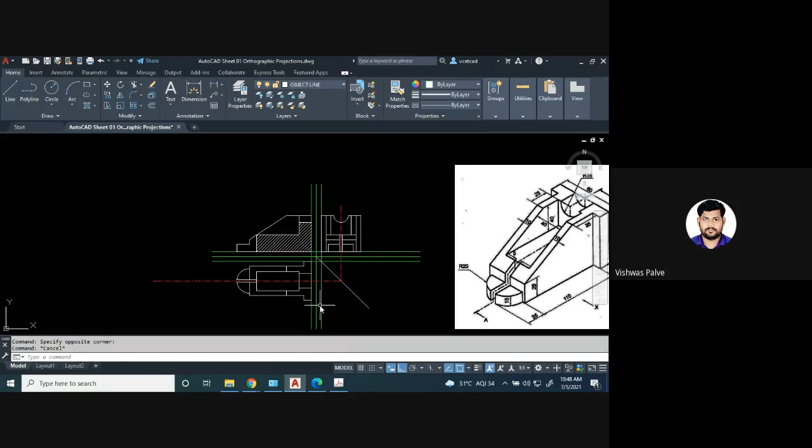Any difficulty in this, you can give the dimensions and try to complete it today itself. Okay, speed up your drawing. Both the assignments I will upload on ERP so that the submission will start from today itself. You can start the submission and complete it in the term workbook.

Okay, yes, any difficulty till now? No, sir. Hello sir. Yes, go ahead.

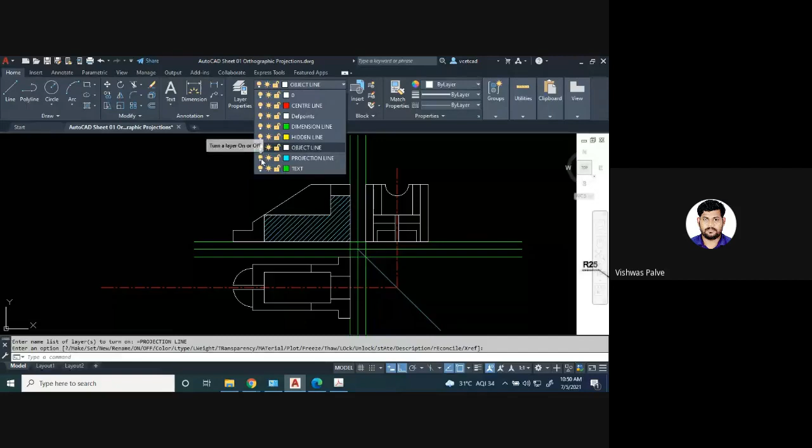Okay, whenever we are drawing side view, you have to show this connection. My front view, top view and side view are connected. How it is connected? With this, right? We are drawing with projections. Now in AutoCAD, what I am doing, I am hiding the projection, but you have to show it, the projections on the paper, and it should be very faint lines. Okay. Any other difficulty?